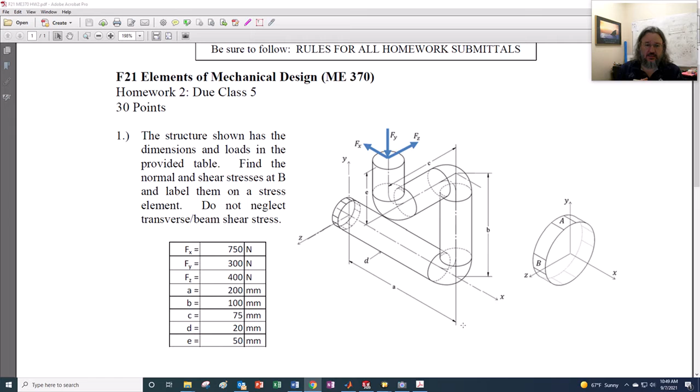All of them are in the negative direction for their axes, and the dimensions of this are 200 millimeters in this direction. 200 millimeters is about 8 inches - you can think of that as 25 millimeters per inch, or 25.4 really, but you could round it if you're trying to visualize. So this thing's like 8 inches long, 4 inches high because it's 100 millimeters in B, and C is 75, so about 3 inches coming this way.

And then E is like 50 millimeters. I usually reserve D for the diameter, so the diameter of this is 20 millimeters, around 3/4 of an inch. Actually, 19 millimeters is really close to 3/4 of an inch. Just if you're ever using sockets and wrenches, you could know that you could actually use a 19 millimeter.

Anyway, I digress. Okay, alright, so here we go.

This is homework 2, and I really do want you to write out the problem. Now, I know this one has a little bit of drafting to it, but that really is the problem. It really does help you think your way through it, and I suggest you use a straight edge, and use the 30 degrees each way for our isometric.

If you take parallel lines as you shift through it, you can take that parallel line and see that it goes up to there and up to there. This kind of exercise, writing out the thing very carefully in engineering paper, is really going to pay off, so I would strongly encourage you to do that. Also in terms of documentation, this is a great idea.

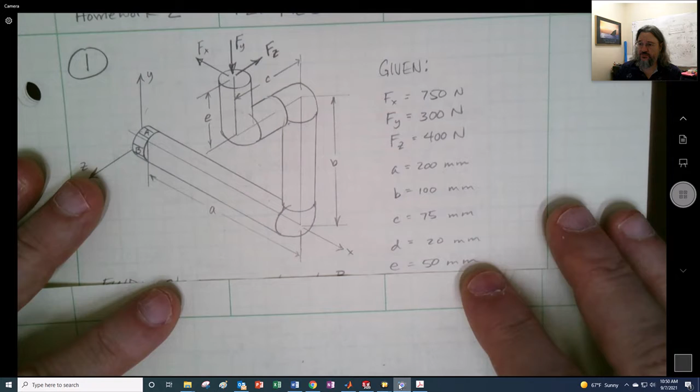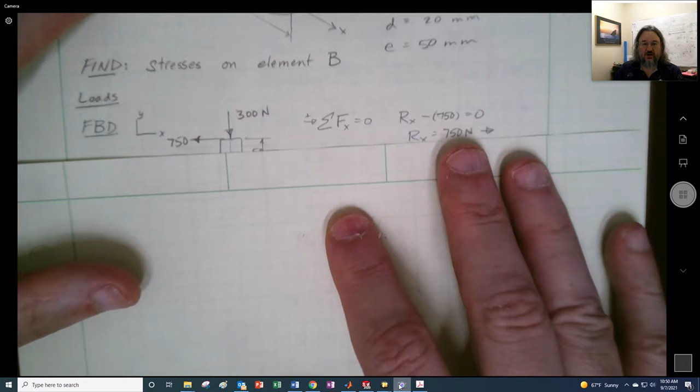Okay, so we want to find the stresses on element B, which is on the side. So our first thing, maybe I'll go ahead and figure out the loads. I start off with my free body diagram in the XY plane.

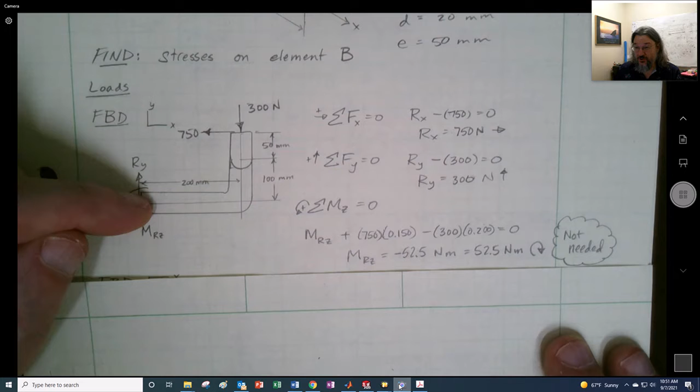And I point out that this is actually not needed. You go, well, why is that? Because we're looking for the stresses at B. The stresses here, or the bending moment here I should say, is going to get you stresses that will be on the top and the bottom, whereas B is right here in the center - that's the neutral axis of this. So this moment doesn't cause any stresses at B.

It's actually going to be about the y-axis that's going to cause a bending stress at B. So this was just for completeness and going through the routine. You could have saved yourself a little bit by not doing this.

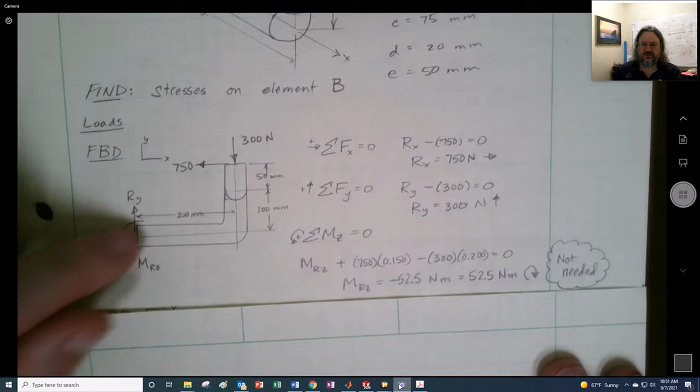We go to the next view right here, and this is the XZ plane, and see that Y is coming out of the page, and we're looking down onto the thing. So we're looking down, and this is a really good exercise to do to see what that would look like in the XZ position. Now here we go.

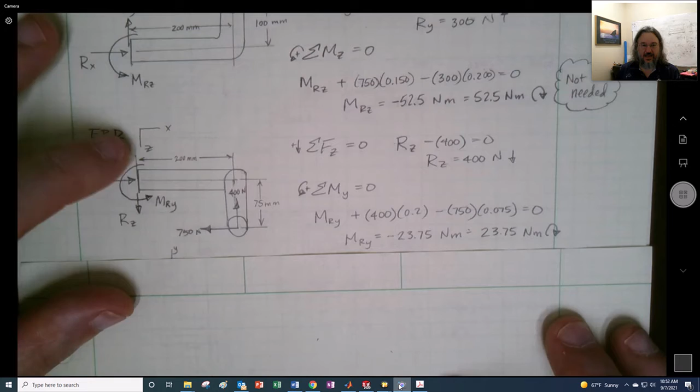In these first 2, I went ahead and found what the reactions were in the X and Y, and then I do it now in the Z. Now the truth is, we could just from observation pick these out because there's only one force in each of these directions. So this is just to reinforce that we should be methodical about our approach to the thing, and try to be neat about it.

Okay, so now we take the moment about Y, which is going to be important to us, and we find that there's a competition between the loads. You can see that the 400 newtons is going counterclockwise, and we're going to multiply that by 200 millimeters, or just 0.2, to get Newton meters. And then the 750 is going clockwise, multiplied by the 75 millimeters right here.

So when I went ahead and chose counterclockwise as the default, based on that I find out that this is actually negative, and therefore it was in fact clockwise. But if I don't know, and this is the case where I don't know because I have these two competing against each other and I'm not quite sure who's going to win out, it turns out this guy wins right here. He's larger than the magnitude of this, so this ends up being a clockwise moment reaction, and I get 23.75 Newton meters.

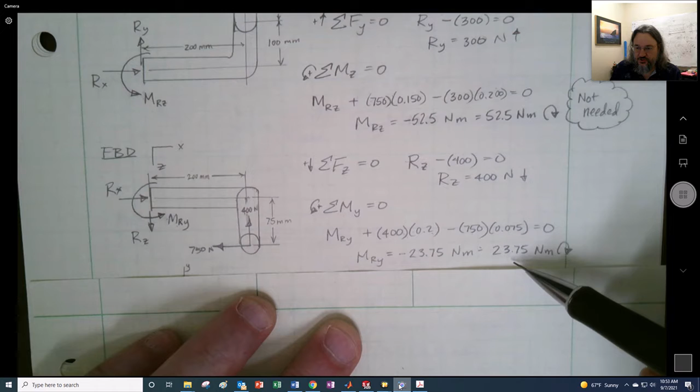All right, and then now I need to have the ZY plane, or the YZ plane, and that's looking down this long axis, looking down in that direction right there. So we're going to see this kind of shape here, and then that's going into the page. So we see this right here, and it's really important to recognize.

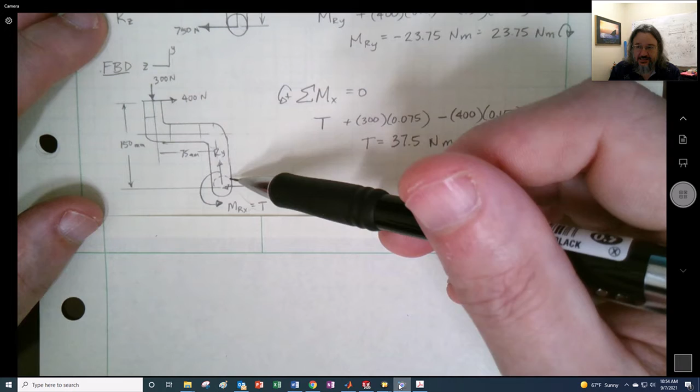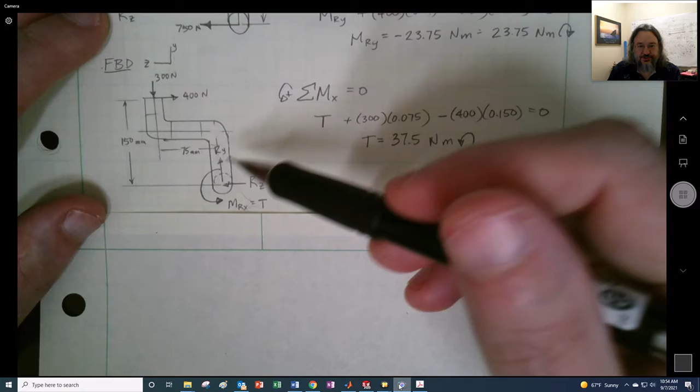This moment right here is going to be the torque, the torsion is going to happen onto there, so I just went ahead and called that T. It is the reaction about the x-axis, but because that's the long axis, that ends up being the torque. And here too, we have a competition between this 400 newtons wanting to go clockwise, 300 wanting to go counterclockwise. But by default I chose it as a positive reaction, and it turns out it was a positive reaction. So yay for that.

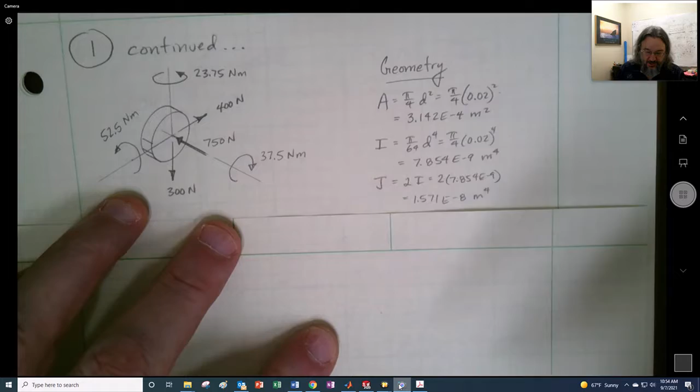All right, so now that we have those loads, I think it's a good idea to summarize this in a stump. Now recall, let's just take a look at the one that didn't matter, right? The one that didn't matter was that 52.5 about the Z right there. But in here, we knew that it was going to be clockwise, so here it has to be counterclockwise, right?

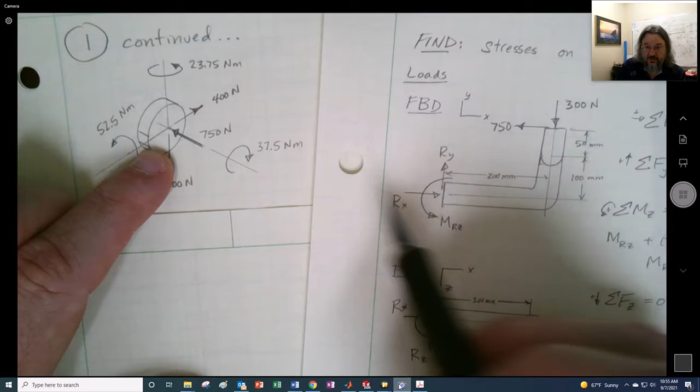Because these, when we're cutting these off as a free body diagram right here, this is cut, we're looking inside this piece. So we're finding this reaction internally, but then there's got to be an equal and opposite for the stump, right? So the thing was cut off as a free body diagram, what was left is the stump, and so inside right there we have equal and opposite. So that was clockwise, that ends up being counterclockwise.

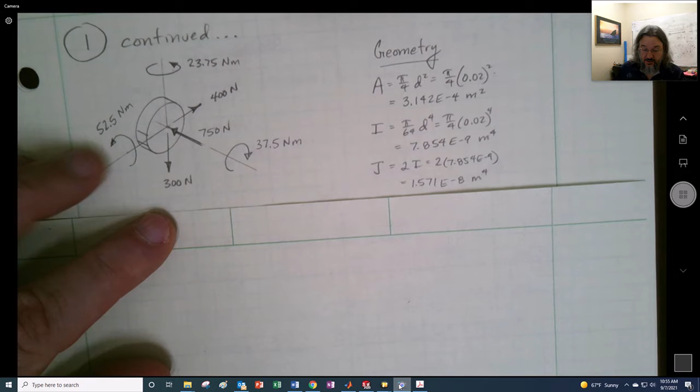Similarly, this is going to be counterclockwise because we found this to be clockwise, and they're equal and opposites, and we cut it inside the thing. And then lastly, we see that this one is going to be clockwise because this was counterclockwise.

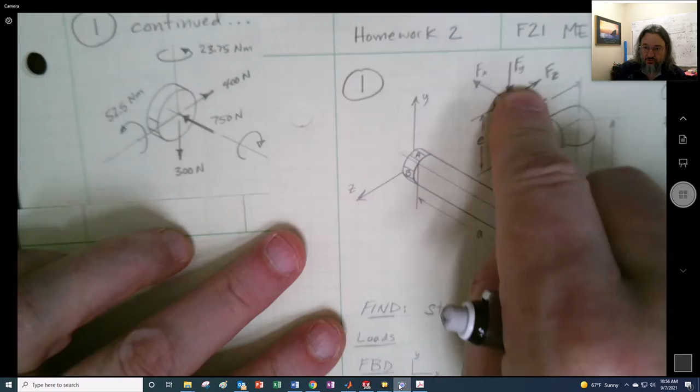And when it comes to the reaction forces, noteworthy, this was down, this was over to the right, and this was into the page if we were looking out right through there. All of these forces, they just transfer from here over to there. Now these are going to be the opposite of what's inside the reactions right in there. Like you see, this is the reaction that's on this face. Well, it's equal and opposite onto this face because we've cut the two. I think I hammered that home.

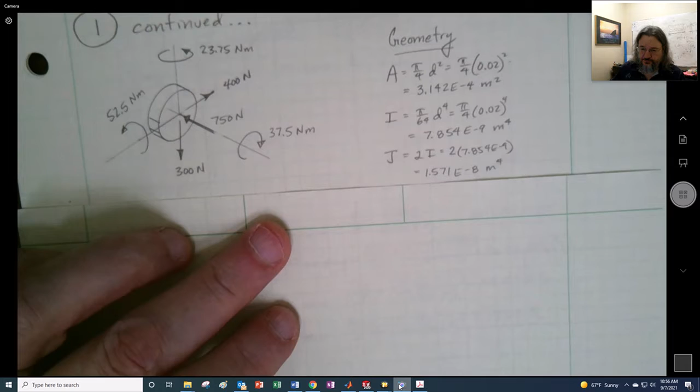All right, now we do some geometry. I could have done this first, but I just get the area, moment of inertia, and polar moment of inertia right there. Now we start to go to stresses.

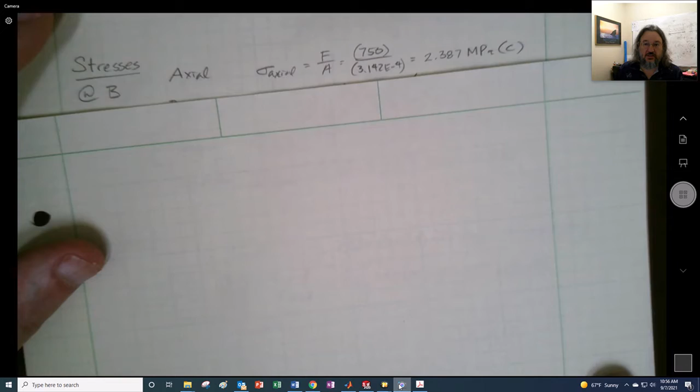And our first stress that's going to be on B is going to be axial, and it's going to be compression. So it's caused by this guy right here because he's right down the axis and he's pushing there and he's squishing it, so it's got to be compression.

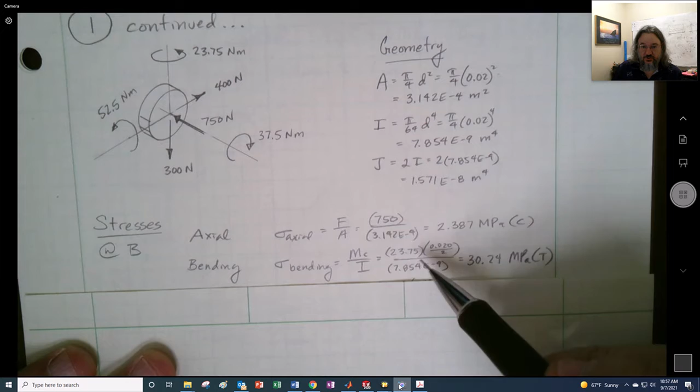We go to the next one. As we mentioned before, it's the 23.75 right here that's causing a stress at B, and it's going to be tension. Now you could see, because it's coming this way, that it's going to be pulling on that. It's going to be pushing on this side, right? So that thing is pushing onto there.

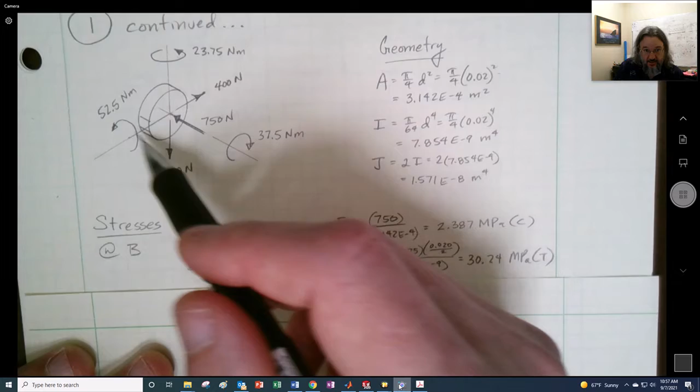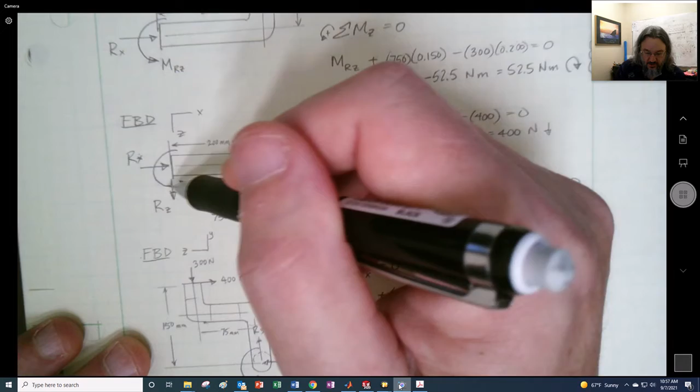You could also have done it off of this guy right here. Now, we have to remember that this is going to be opposite, so it's actually in this direction. We could revise this drawing, but then this would be true, so I'm going to keep this drawing the way it is. But remember that it is actually coming in this direction right there, and this is where B is. So even from here, you could see that it's causing a tension pulling onto there.

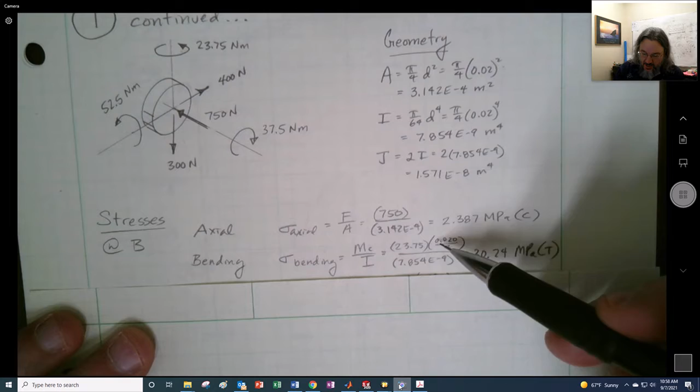And now we come down to torsion. We'll talk about direction here in a second, but we know that this is the 37.5.

And so R, which is the same thing as the radius, is half the diameter, which is 20 millimeters. So it's 0.01 is what R ends up being, and we divide by the polar moment of inertia right up here.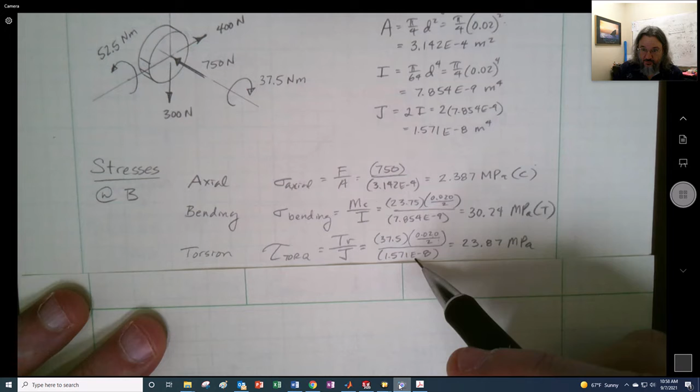And then our last stress on this is the transverse, that's the hardest to remember most of the time. We'll note that we want to go to the force. This is 300 because the transverse is maximum at the sides, each side. It's 0 where it passes through. So you might mistakenly want to choose 400, but it's going to be 0 - 400 creates 0 where it's passing through the thing. 400 would actually create maximum shear up here and down there.

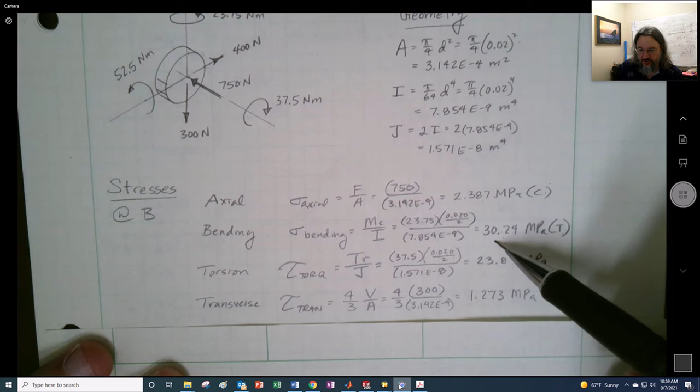So that's what to remember. Now we want to look at the direct stress. We know when we sum this up, that's compression and that's tension. These are going to counteract each other, so this reduces some of this - we're going to subtract that from here when we get to the force. So here's me combining the two things. We see that's subtracted out, so that's what the overall X stress is going to be.

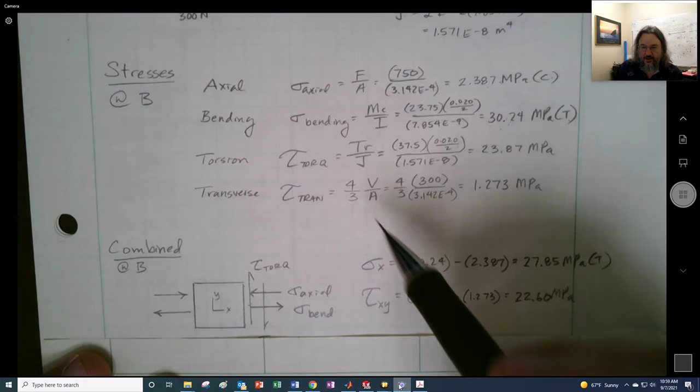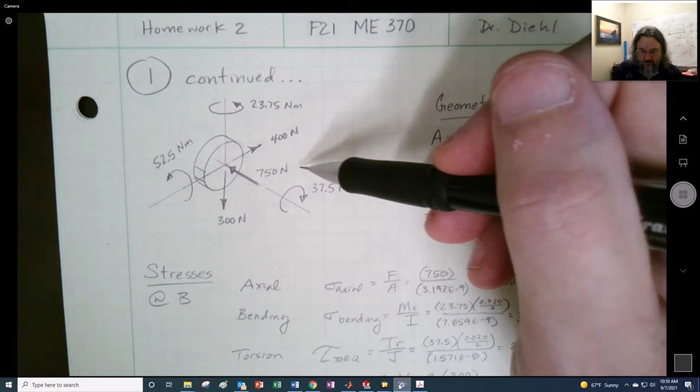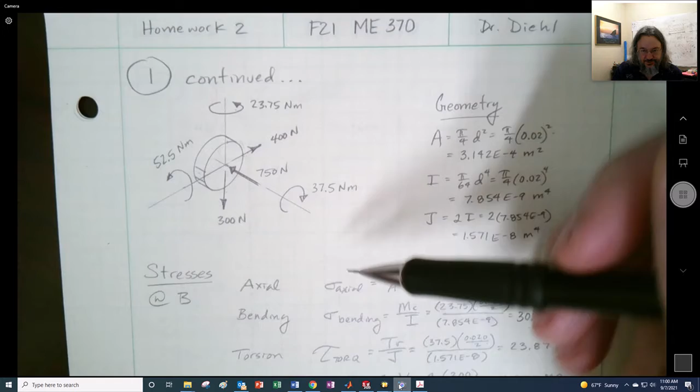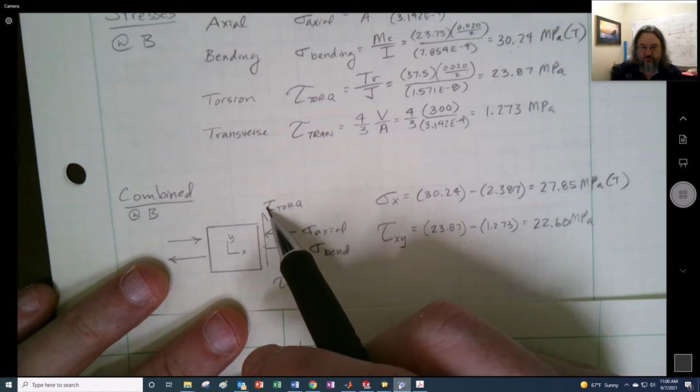Now this one takes a little more thought - the torsion. Let's take a look at the torsion from up here. This is the cube we're looking at. It's going to be coming up the face, you can see how that's rolling around this way. So the torque is going upwards if this thing is in the XY plane, which it is, right, so the torque is going to go up the face. But then you see this transverse, it's going down the face, because of this right here, so that goes down the face over there. So you can kind of picture those: torsion coming upwards across the face, transverse coming down, and we subtract that out. So that's what the total shear is going to be.

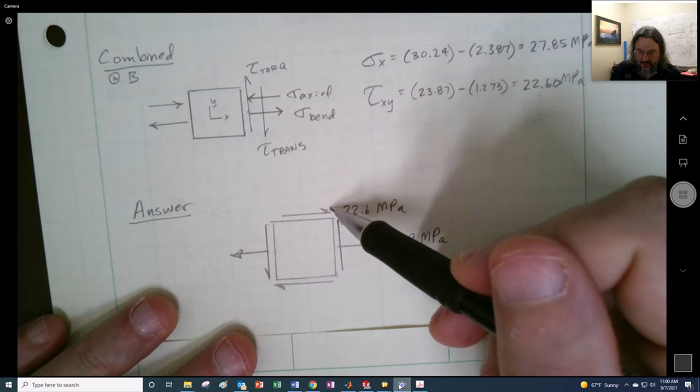And then we summarize it on a stress element, making sure that we have these arrows - these got to point towards each other, and these have to point towards each other. So that's like problem 1. I tried to go through that relatively slowly. I will post this video and you can work through those yourself.

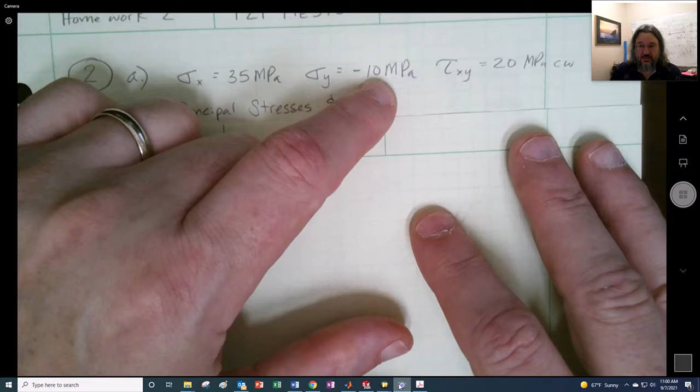Okay, so here we have principal stresses, and I'm looking at the clock - I have 20 minutes till class, so I might want to go a little bit faster. For the principal stresses in this problem, we have positive, so there's tension, there's going to be negative, so that's compression, and then we have 20 clockwise. So let's take a look at that.

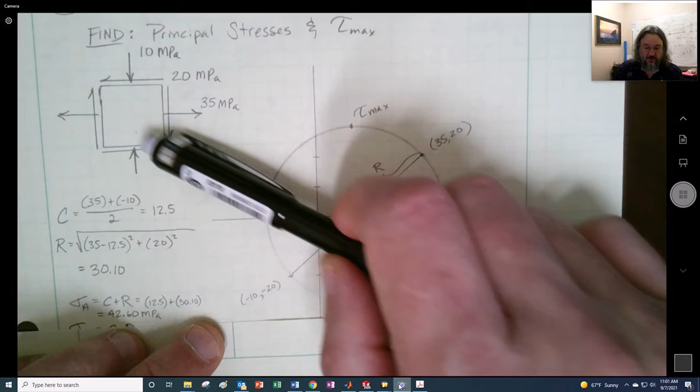How I went about that: I drew that on a stress element, then I took this face right here and plotted that point, 35 and 20. And then I took this face right here, which is 10 but in compression, so that's over here on the negative side. And this is counterclockwise, so it's in the lower part - this one was clockwise, so it goes to the upper part of our tau. I should probably have labeled these too, by the way - tau, sigma.

So I drew a line between them, I find the center of them, so it's the average of them, and it gives us 12.5. And then I need the radius. This one right here was easier to take as the radius, so I went ahead and found the X leg of this, which is really just this stress minus C to get that leg right there. So they have 35 minus 12.5, which I've just found, and then we get the rise, which is 20 right there. And so that's the radius.

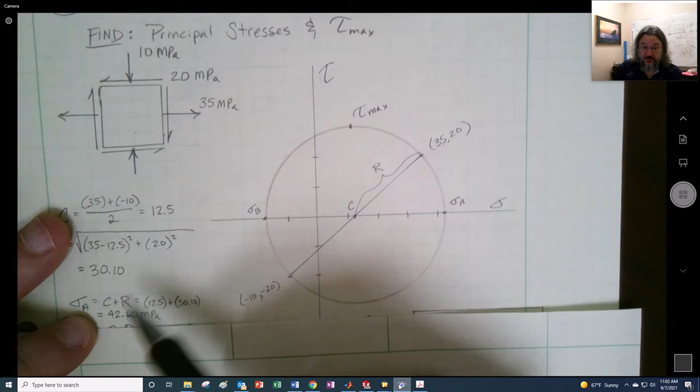To get the first principal stress that I'm calling sigma A, I add the center and the radius together, and that's my answer. For the next one, for B, I subtract the radius from the center, and of course I get a negative value, which I anticipated by way of my Mohr's circle. And then I can summarize, noting that the maximum shear up here is equal to the radius - there's the radius there, but it's also equal to this. So there you go, there's the solution.

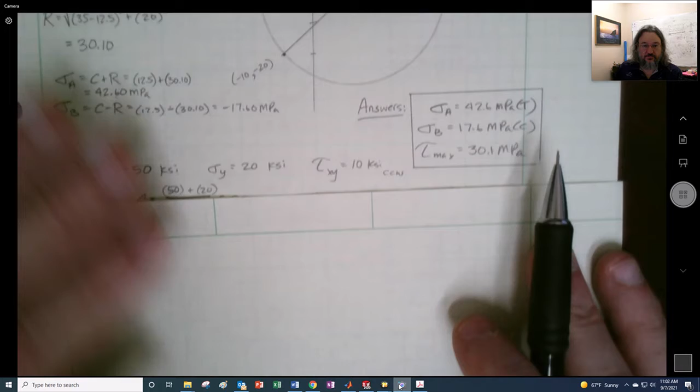Here is the second problem. I went ahead and did pretty much the same routine.

In this case, we have tension and tension, and then this one's counterclockwise. So it looks like this right here: tension and tension, and then that's counterclockwise right there. So that's the one that I'm referring to most often.

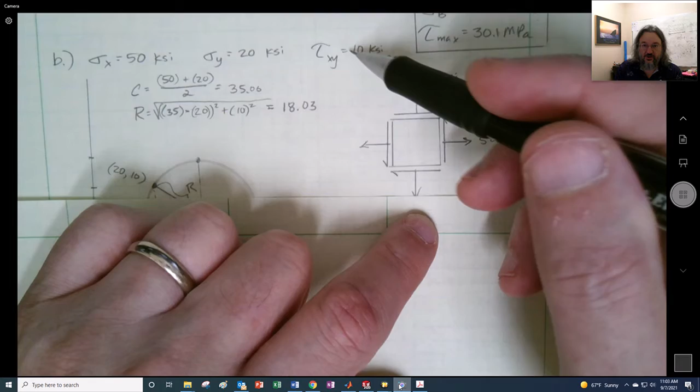There's that right-hand face, and then here I do the same thing. I take the average, and I get, well okay, first off, I plot the points. So I plotted this face that ends up being down here, and then I plot this face, which ends up being right there.

And then I find the average, 35.00 - I think that's a 0. That looks like a 6, doesn't it?

And then I find the radius, and that's going to be easiest if instead now I take the center and I subtract out this, what I'm calling sigma y right there. So that's going to get this leg, and then of course plus the square of this.

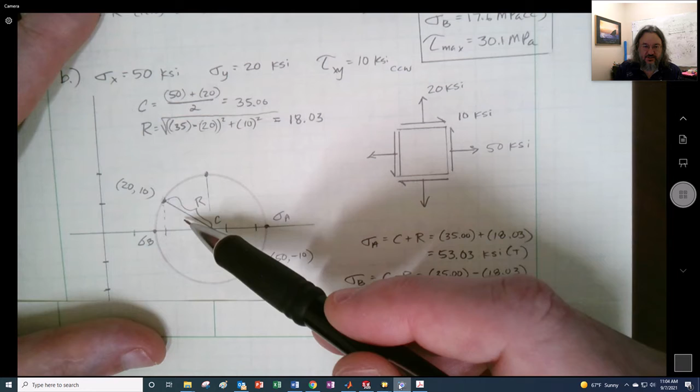So now I have the radius, and for principal stress A, it's C plus R; principal stress B is C minus R. These are both positive numbers, so they end up being tension. So right here is the answer.

Now this next problem is a difficult one, but we do it over and over again, so we want to make sure that we master it.

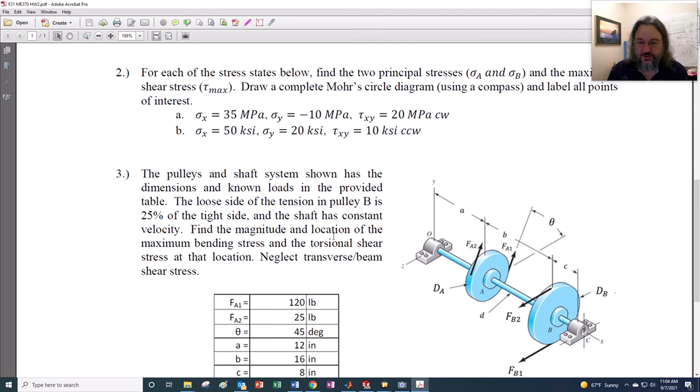All right, so we have, let's see, I'll go look at this right here. Here is the problem where we have pulleys, and we're given these forces, but we're not given these. So this is 120, and this is 25.

This thing is at a 45-degree angle. The distance here is 12, 16, and 8. And the diameter here is 3/4 of an inch. That's pretty big.

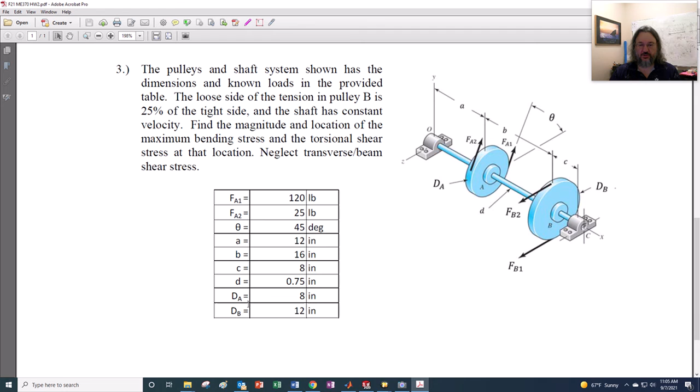And then the diameter of this pulley is 8 inches, and the diameter of this pulley is 12. So I drew out the thing. Didn't make it exactly looking the same there, but I communicated it pretty well, I think. Looks decent, right?

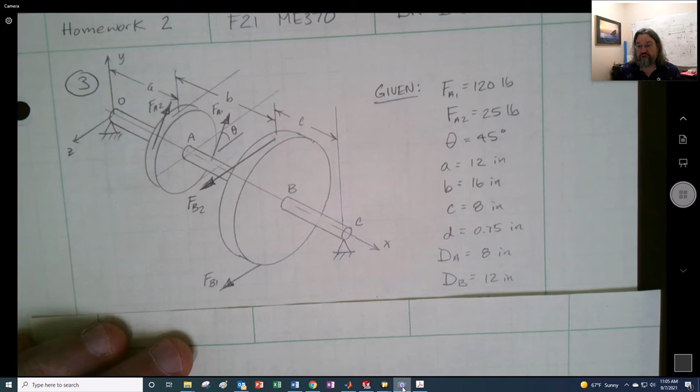And we want to find the maximum bending stress and the torsional shear. We also know that the loose side of this is 25% of the tight side.

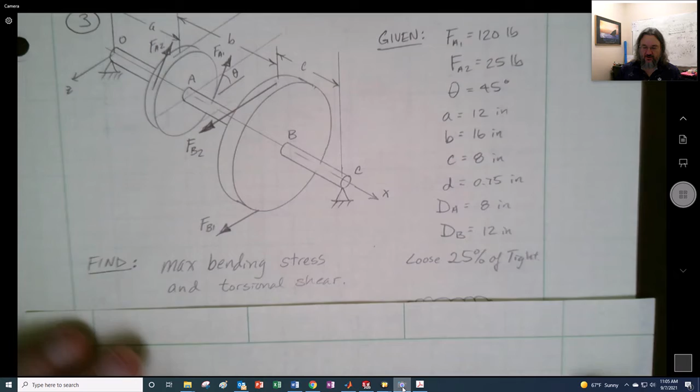So I did the geometry first. We don't need that area, but I went ahead and did it anyway.

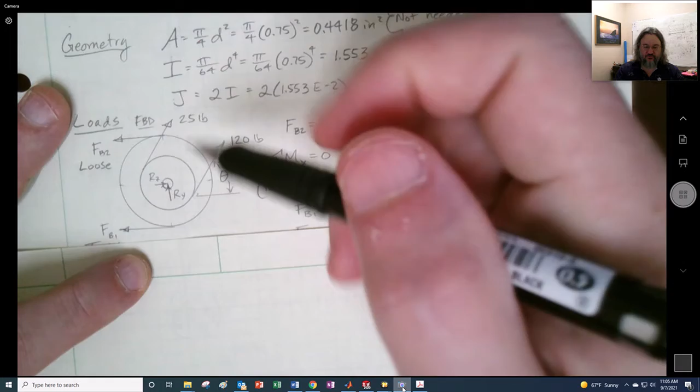Now my first load that I want to try to get, I want to find these unknowns. And just from observation, seeing that this one is more than that one.

So I drew the free body diagram with everything intact, right? So I'm looking down the x-axis here. So everything is intact.

And I take sum of them. Well, first off, before you even do that, I can see this one is more than that one. Therefore, this has a tendency to make it counterclockwise. So this one needs to be more than that one to go clockwise, to counterbalance the thing, right?

So I can write out that statement right there, that they said the loose one is 25% of the tight one, right? There you go.

And then I take my sum of the moments about the x, and I'm able to, I put in this FB1 here, right?

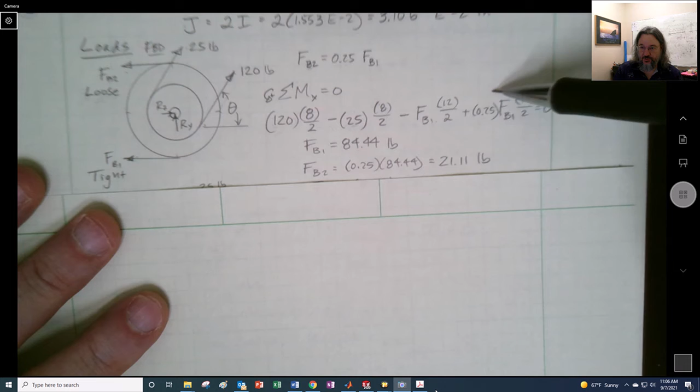And we can see we have positive and negative for each of these things. And then I put in for FB2, I just substitute this relation, and I'm able to solve for FB1. And then FB2, of course, obviously once I knew FB1, I could put it back into there.

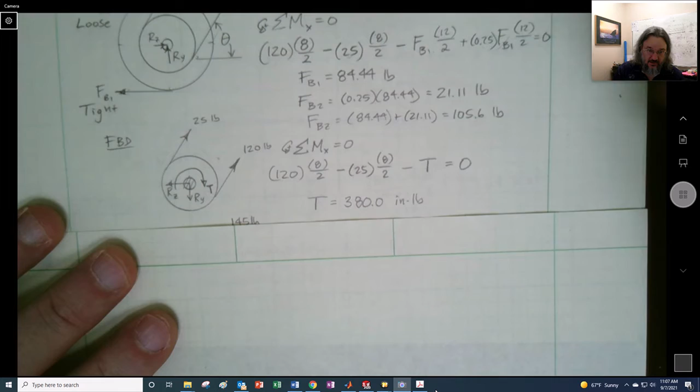Now I need to do this whole thing again, but now I want to do it with the shaft cut, and maybe I shouldn't have made it that cross-hatched right there, right? So the shaft is cut, and I take the sum of the moments and balance it out.

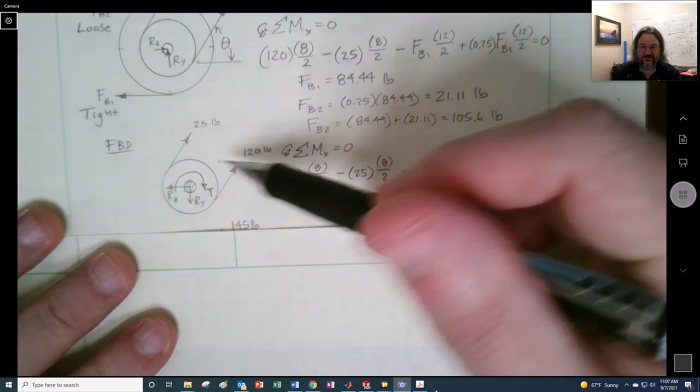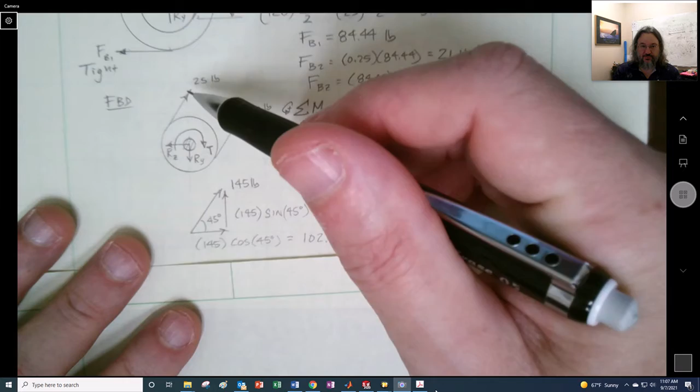So this is the torque that's inside the shaft that is resisting these pulleys right here, and I find that it's 380. And I also, while I'm here, I decided that I wanted to find what the total force is going to be between these two combined in the Z and the Y direction, because I'm about to use that over onto the next thing right there.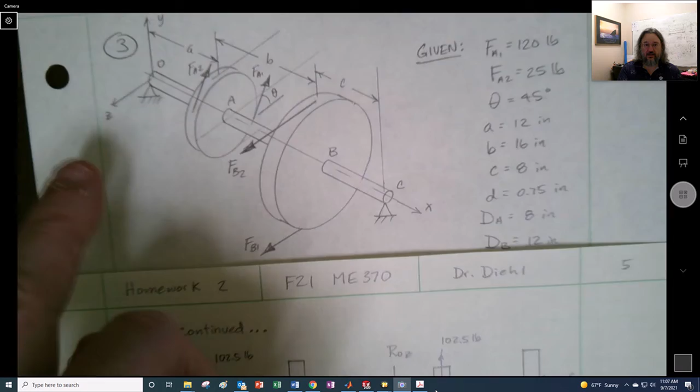Okay, so now I take and I make two diagrams of my original problem. Right here's the original problem, and I look at that view of the XY, and then I look at that view right there of the XZ.

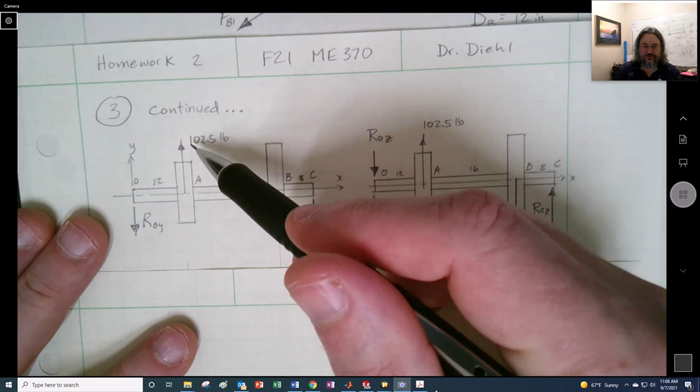I have it all laid out with my dimensions, and you can see here's part of that force from the 45 degrees, and here's the other part from that force at 45 degrees. There's nothing on this one in this view, but when we're looking down upon it, the combination of both of these forces are all in the z direction.

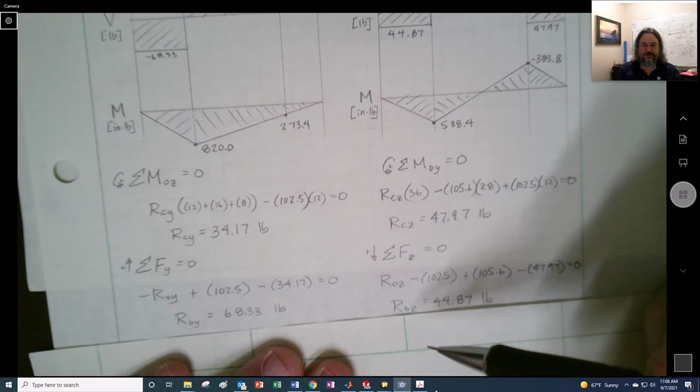So I go ahead and do my statics on this. Sum of the moments, do it about O. It's a good place to start. Do it about here first, and then I'm able to get what this reaction is. We can see that both of them are going down because that's the only load going onto there. Then, with the sum of the forces in the y direction, I'm able to get the reaction in the y direction. So I have both of those reactions.

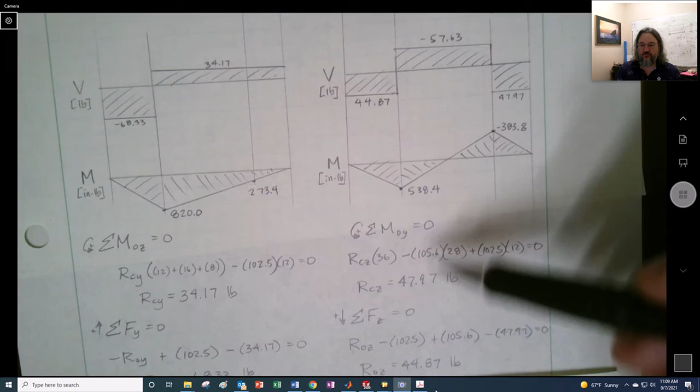I do the same thing over here. Take the sum of the moments about this point right here, and I'm able to get this reaction. Then I take the sum of the forces in the z direction, and I get this other one.

Notably, this force is going that direction, this force is going that direction. So the reaction here, this one's pushing down against that, and this one's pushing up against there. Sometimes we can have it where one of the magnitudes is so large that one of the reactions close to there will go in the same direction - it's like a teeter-totter effect. It just matters what these distances are and the magnitudes, so just be aware.

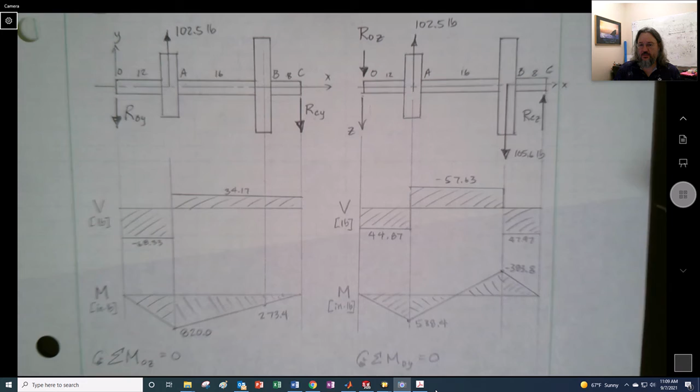But anyway, so we have this kind of situation for our shear moment diagrams, which I'll briefly mention, where we have this reaction coming down. So we start at that reaction, and then we place this force onto it, so we add that to it.

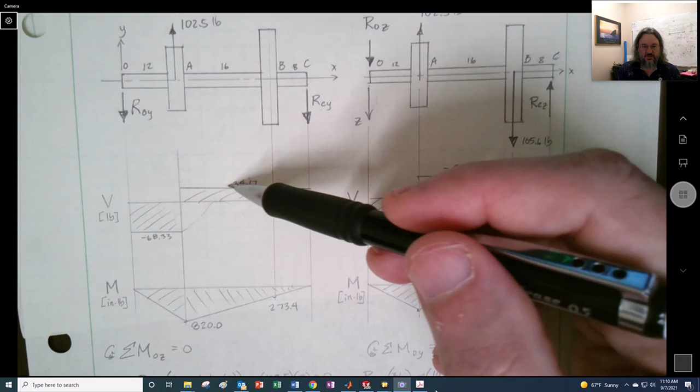So that was negative, and then we add this to it. And we come along, and this value right here, once we added this, this better be equal to this reaction, because as it comes along over here, when we get to that, it needs to come back to zero.

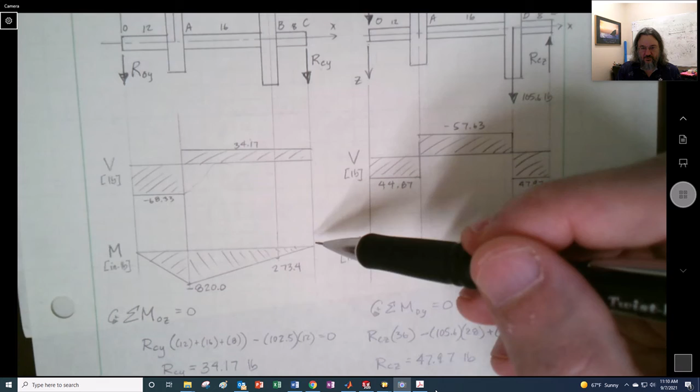And then to get the moment of this, we just take the area of this - that's just 68.33 times 12, and we get this, and actually that should probably be negative right there. Then we get up to this value, and it's going to come down and go to zero. As an easy way of finding this value, all we need to do is take and find this area right there, and that's going to give us this value.

In a similar way, we had this reaction coming downwards of 44.87. We get to this point over here, and we add that - or actually subtract it, because this is the negative direction, z is in that way. And then we come over here, and this force comes downwards, and we end up getting 47.97, which we should have got from statics anyway, but we can confirm it.

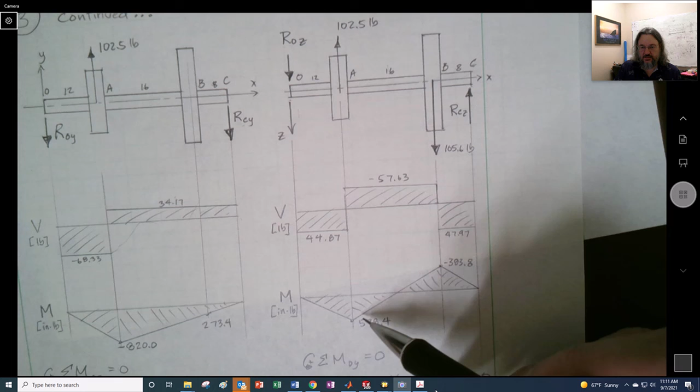And then we find the area right here, get it right to there. Easiest way to find this one is to go from this direction instead and find the area of this, so that's going to come up to here. And then you can see that it crosses right there. There might be some situation where we might want to find this, but we don't need to do that right there.

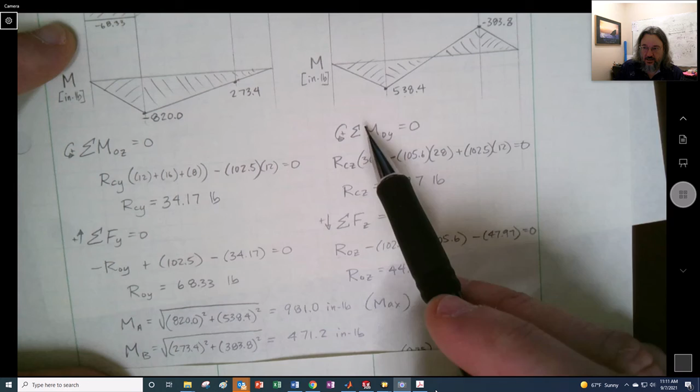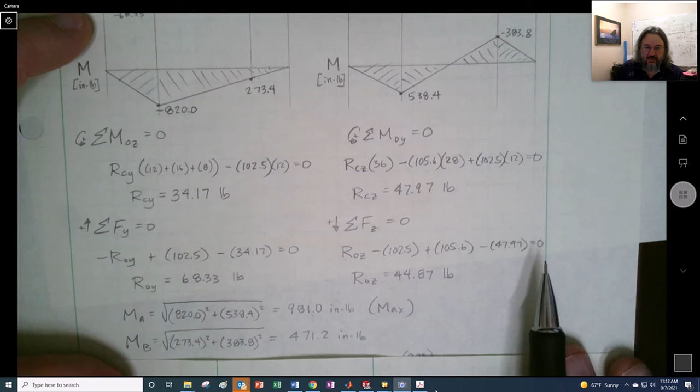And so we want to get the magnitudes of these moments. So we get A and A together, because this is both in the same spot on the shaft, and we get this magnitude right here of the total moment. We do the same thing for this point and this point, and we find this is the most - so the most bending occurs right here at A.

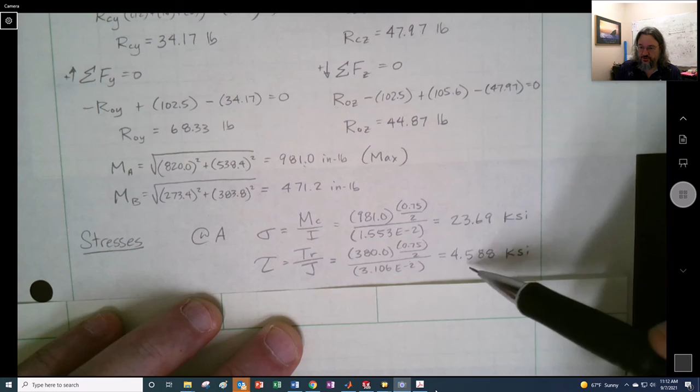So we want to find the stresses at those places. We take that and do MC over I, and we get 23.69 KSI. For the shear, we take TR over J, and we're going to neglect transverse shear in this one. So the only two types of stresses in this are going to be a bending normal stress, and a torsional shear. And then here's the answer.

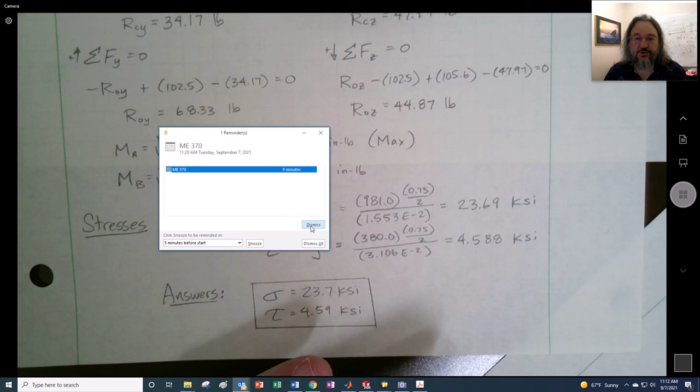So there you go. It was a long and involved explanation, but certainly going to be shorter than me writing it all out.